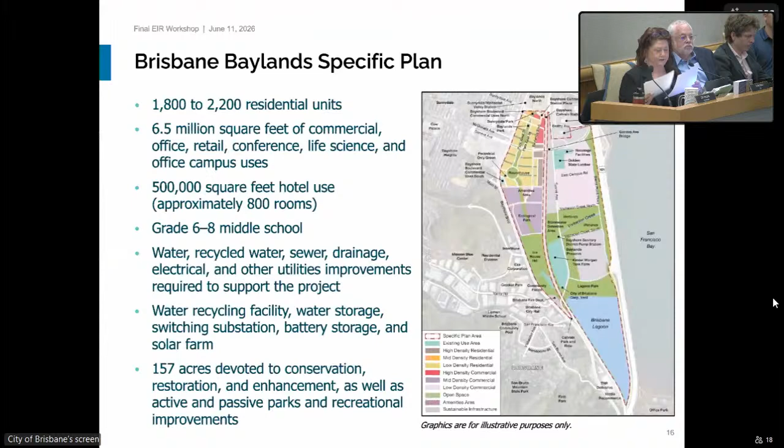An overview of the project. We went through this 2 weeks ago, so I'll make this brief, but the project includes residential, commercial, office, retail, and other kind of associated uses, a hotel, middle school, various infrastructure improvements, and just shy of 160 acres dedicated to conservation, restoration, enhancement, including active and passive parks and recreational improvements.

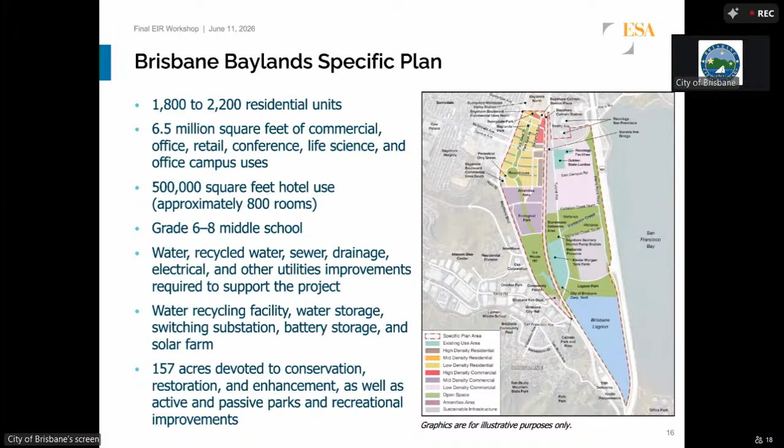The project history, I'm going to try to wean this down just a bit, but it essentially began in 2005 when the applicant first filed a specific plan, or the property owner did, and that initiated kind of the preparation of the specific plan application, and it continued through to 2011 when the applicant then submitted a revised specific plan addressing the entirety of the site.

And that began preparation of a programmatic EIR. City Council certified the program EIR in 2018 and approved General Plan Amendment 1-18, which was then placed on the ballot for ratification as Measure JJ, which was approved by the voters in November of that same year in 2018.

Subsequently, General Plan Amendment 1-19, which was related to fully implement Measure JJ, was approved in 2020. That required revisions to what was then the current specific plan. So between 20 and 23, the applicant prepared a revised specific plan, which commenced then the environmental process for what's in front of you today, this EIR.

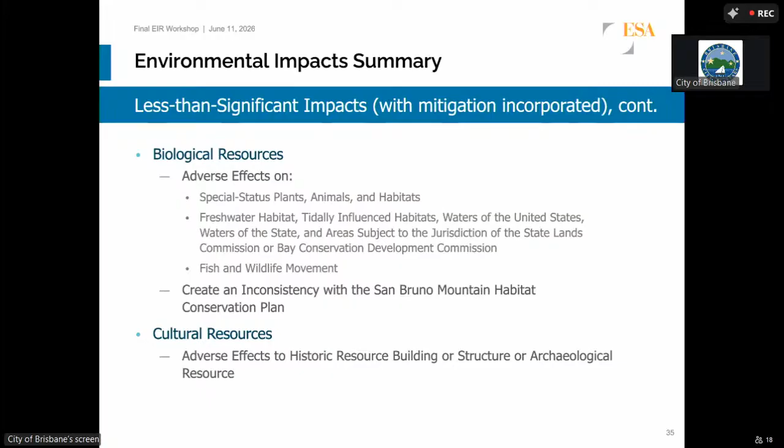Cultural and historic resources, in this case the roundhouse, and archaeological resources would be reduced to a less than significant level with mitigation.

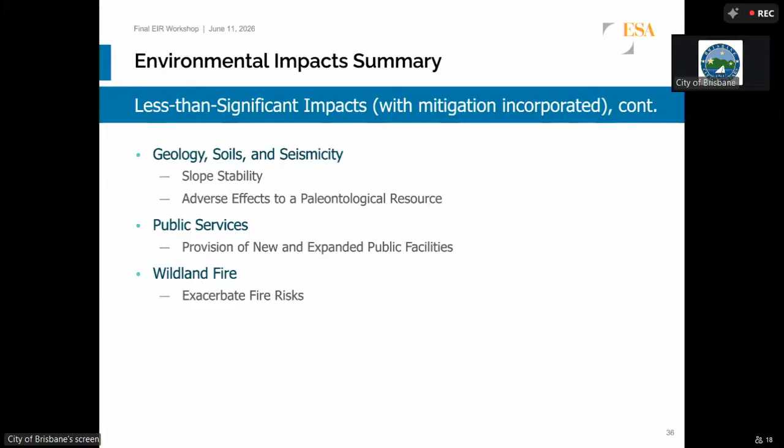Geology, soils, and seismicity, slope stability, fine with mitigation. Paleontological resources falls under geology, but I continue to think of it under cultural. With mitigation, that is also less than significant. The provision of new and expanded public facilities would be properly mitigated, and there would be no exacerbation of fire risks.

I'm going to have the same admonition I did with the less than significant without mitigation. Transportation, air, and GHG will be covered in much more detail with my colleagues, but essentially this project would facilitate other travel modes - transit, bicycle, pedestrian - would not create hazards to vehicles, bicyclists, or pedestrians, and would not impede access for emergency vehicles, would not expose sensitive receptors to substantial pollutant concentrations or odors. I'm going to skip GHG and let Mr. Schuster cover that in detail.

Same with vibration - it would not result in temporary or permanent increase in vibration or expose people to high vibration levels. And hazards and hazardous materials - any routine transport, use, disposal, or management are covered by a vast range of regulations. Similarly, there would not be any hazardous or acutely hazardous materials or waste used or emitted within a quarter mile of a school.

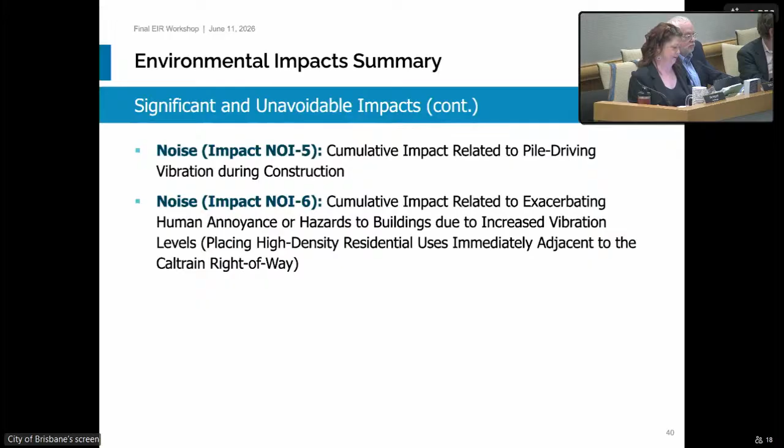Okay, thanks Terry. Evening commissioners. I'm going to talk about air quality, noise, greenhouse gas, and energy.

The EIR concludes that construction and operational emissions would exceed Bay Area regional thresholds without mitigation, and identifies all feasible mitigation to reduce emissions from sources including construction equipment and trucks, fugitive dust, paints and consumer products, emergency generators, operational trucks and passenger vehicles, and other sources. However, given the size and scope of the project, these mitigation measures are not enough to reduce emissions below the bright line criteria pollutant thresholds, and this impact remains significant and unavoidable.

I want to make a distinction between the health risk impact, which is AQ2, which looks at toxic air contaminant exposure. That impact is less than significant. So one is just regional mass emissions of ozone precursors and particulate matter.

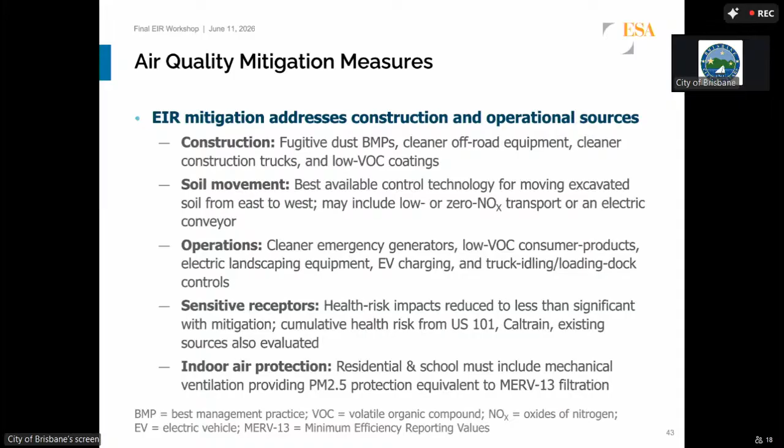Many of these measures also reduce health risks and greenhouse gas. Next slide.

Summary of AQ2, which is exposure of sensitive receptors to toxic air contaminants, primarily DPM and fine particulate matter, or PM2.5. This analysis looked at existing offsite homes near the project site, as well as new on-site receptors — meaning children, residents, schools, daycare, hospitals, that kind of thing. Basically anywhere a child or potentially susceptible person could live.

The analysis also looked at cumulative health risks — would the project exacerbate existing sources of TAC emissions? These include things like US 101, Caltrain and rail sources on the railway, permitted stationary sources, and other sources within a radius of the project site that exist currently. The project is required to install air filtration at residence and school locations.

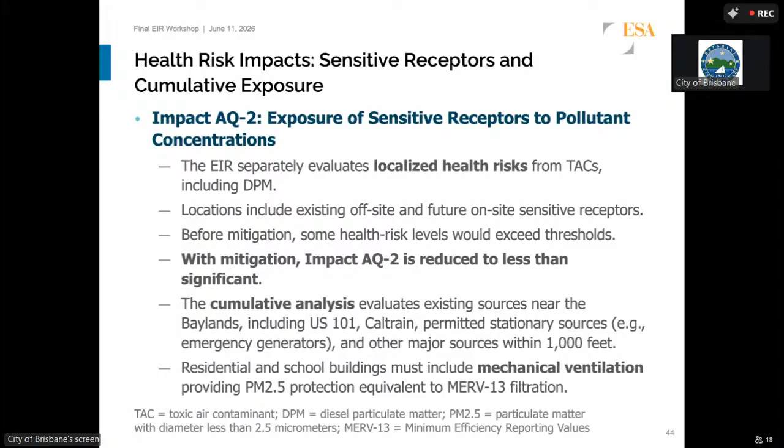Next slide. A couple short FAQs here. What controls construction dust? The project's Stormwater Pollution Prevention Plan, or SWPPP, requires dust controls, including air district best management practices. These include things like watering exposed surfaces, covering haul trucks, street sweeping, speed limits on unpaved roads, equipment wash off, etc.

Diesel generators is another topic that came up in response to comments. The project has extensive solar and battery backup systems, so the question is, why do we need diesel generators? The main reason is it's required by California building code for certain building types during power outages and emergency use to supply critical power. These generators will only be needed during those emergency events, and the on-site battery systems will substantially reduce the need for them, although the EIR did assume a conservative assessment of their operation.

Finally, data centers and warehouses — those are not permitted uses at the Baylands, so the EIR did not evaluate air quality impacts from data centers.

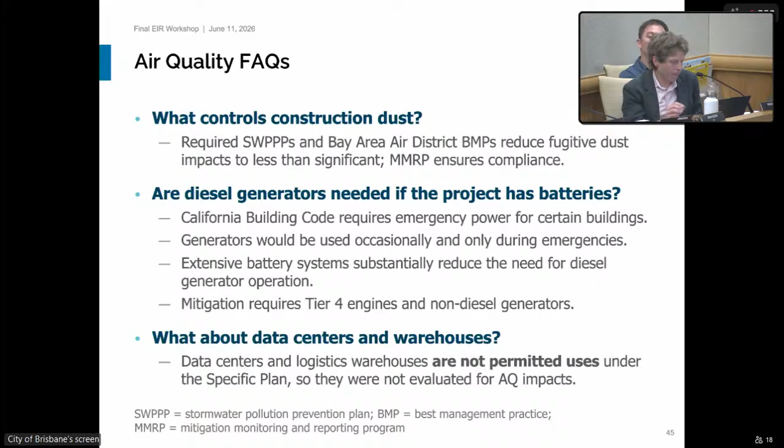Moving on to noise. The first significant and unavoidable impact is Noise 1, which evaluates construction noise. The analysis considers the full build-out, multi-year construction, daytime and possible nighttime work, both on-site and off-site noise receptors, and a wide network of monitoring locations. Sources include pile driving, soil hauling, on-road trucks, and off-road equipment. The various thresholds evaluated include local code standards — time and noise levels expressed as dBA, or decibels above ambient or total decibel levels.

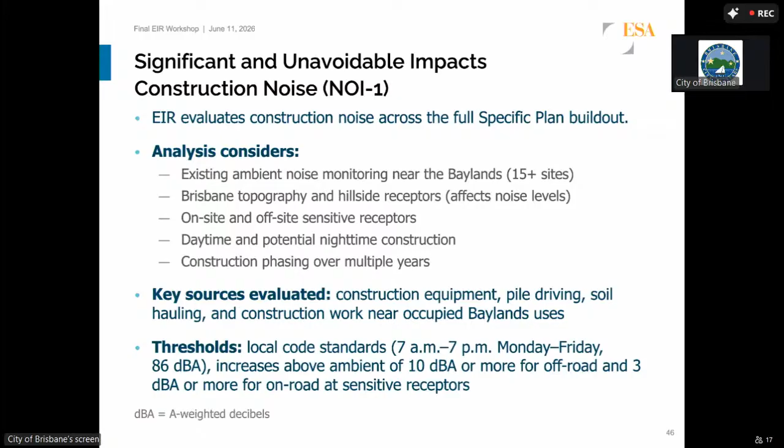Next slide. The analysis found that noise sources would exceed those thresholds in some cases, mostly from overlapping construction activity and pile driving near occupied uses, as well as trucks hauling soil on Bayshore, Tunnel, and Blanken. The thresholds are lower for nighttime, so there are also some nighttime impacts.

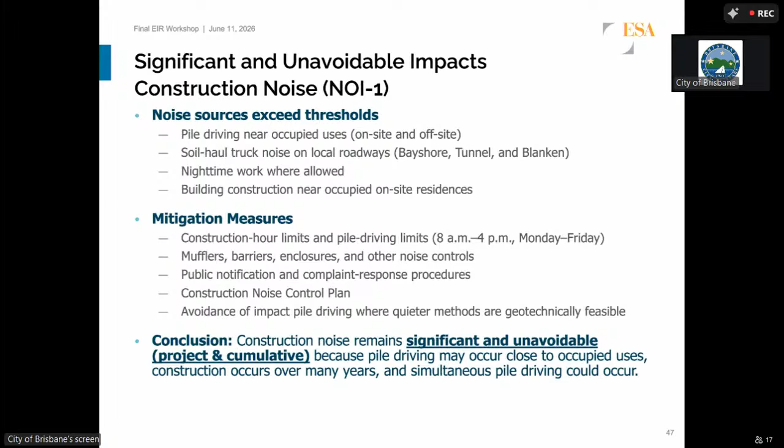There are a lot of mitigation measures to reduce these impacts, including hour limits on construction, further hour limits on pile driving, barriers, mufflers, and enclosures, a public notice and complaint process, and construction noise control plans for development, which require city approval.

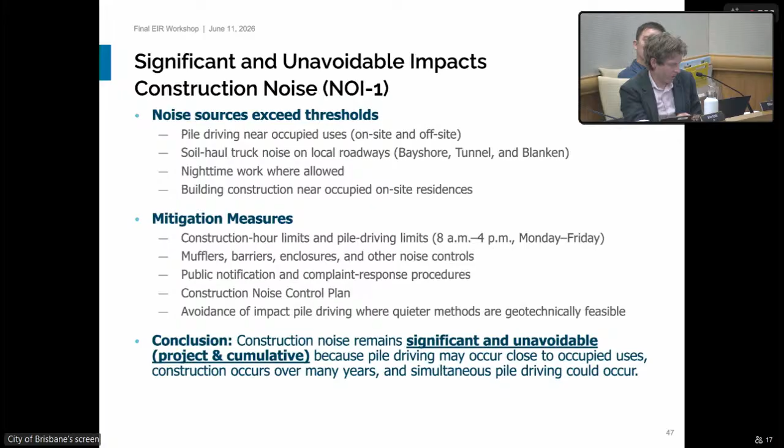However, despite those measures, the impact remains significant and unavoidable because pile driving and other activities may occur simultaneously near receptors. Next slide.

Oh no, okay, my computer just crashed. But I have a backup. Does it have my notes? It has notes — I printed out a copy of this, so I will go to the hard copy. Where were we? Noise 2, right? Okay, there we go.

So impact Noise 2 looks at operational stationary noise sources. These are things like mechanical equipment, HVAC, loading docks, parking, wastewater reclamation facility, amplified sound, and battery storage and substation.

Mitigation for this impact includes similar measures to construction: screening, setbacks, barriers, mufflers and enclosures, loading dock controls where trucks would park and operate, and future acoustical studies on development, which again requires city review before approval. The finding here is that although individual sources can be controlled and must meet standards to reduce their individual noise impact, the aggregate of noise sources will exceed the threshold — in other words, noise from multiple sources happening at the same time.

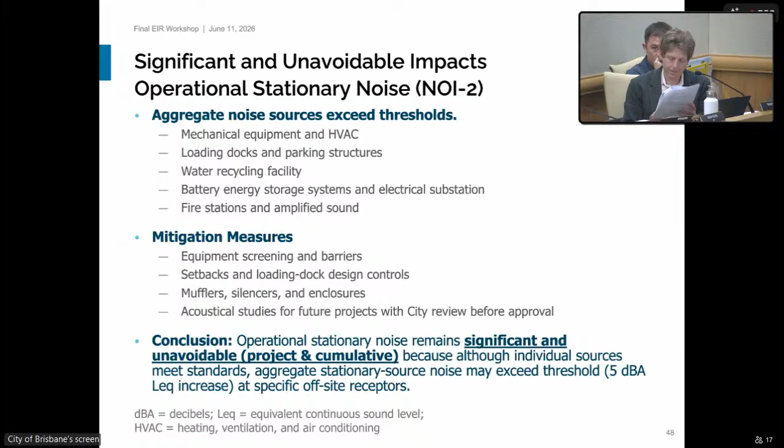Although I will note that, and Matt will touch on this later, the project has a very comprehensive TDM program to reduce trips and VMT.

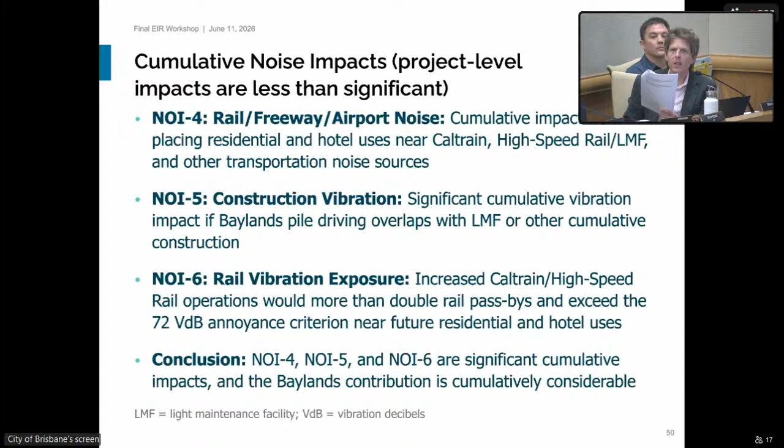The remaining noise impacts are listed here. These are less than significant at the project level, but are cumulatively considerable. Number 4 is rail, freeway, and airport noise, which includes things like Caltrain, high-speed rail construction and operation, and other off-site transportation noise.

Number 5 is construction vibration, which is vibration from construction activities—again, a cumulatively considerable impact due to overlaps with high-speed rail activities mostly. Noise 6 is rail vibration exposure, from operations of rail. So Caltrain, high-speed rail, plus project vibration would have a cumulative effect.

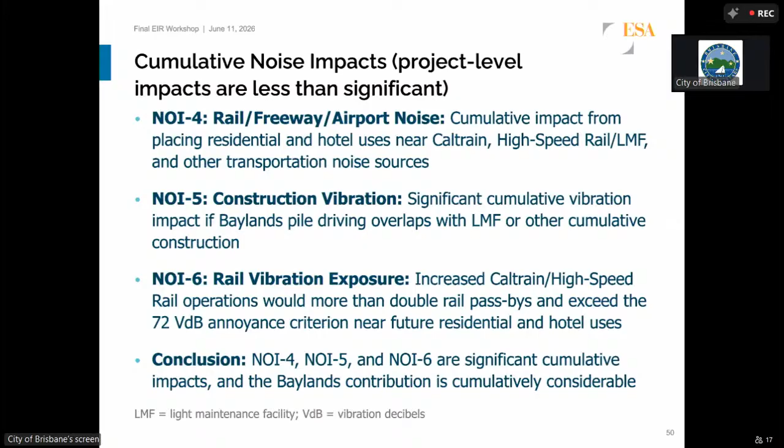Okay, next slide. Moving on to greenhouse gas.

In the draft EIR, this is a major revision in the final EIR, which removed impact GHG1. GHG1 focused on project site emissions and compared to a net zero threshold, or basically a zero threshold of greenhouse gas. This was removed in the final EIR to better align with air districts, the Bay Area Air District's greenhouse gas thresholds, which are a BMP list of project features, and also to better align with the state's climate goals for housing, transit-oriented development, and other related objectives.

So the EIR did evaluate greenhouse gas under impact GHG2, which was a quantitative assessment of emissions, as well as GHG3, which was a consistency analysis with applicable plans and policies. Next slide.

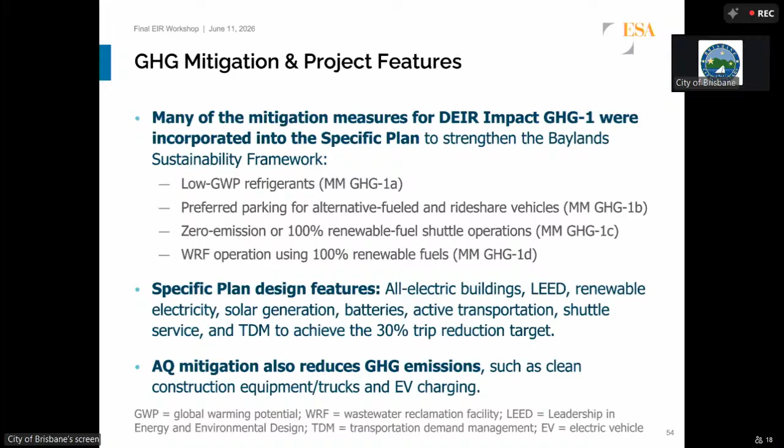All right, and then we're on to energy, and I'm almost done. We had 2 impacts on energy. One is looking at whether the project consumes energy in a wasteful or inefficient manner. Given the sustainability and efficiency features of the project, as well as the extensive solar and battery systems, this impact was found to be less than significant.

Impact 2 looks at conflict with energy plans and policies, including regulations like Title 24 and CalGreen standards, EV charging requirements, city reach code, and the transit-oriented growth framework of Plan Bay Area. This impact was also less than significant because the project complies with all of those.

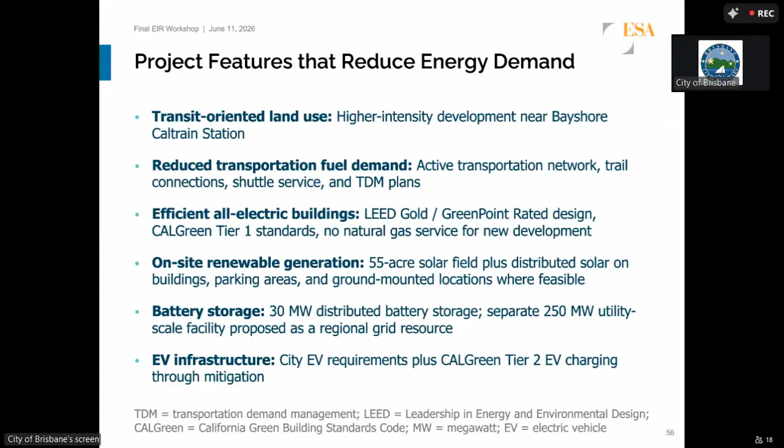And then finally, a slide summarizing various features that reduce energy demand of the project, including transit and vehicle fuel reductions, electric and efficient buildings, on-site renewable generation, and off-site renewable requirements for the remainder of electricity, battery storage, and EV charging. And I think that's the end of that. Okay.

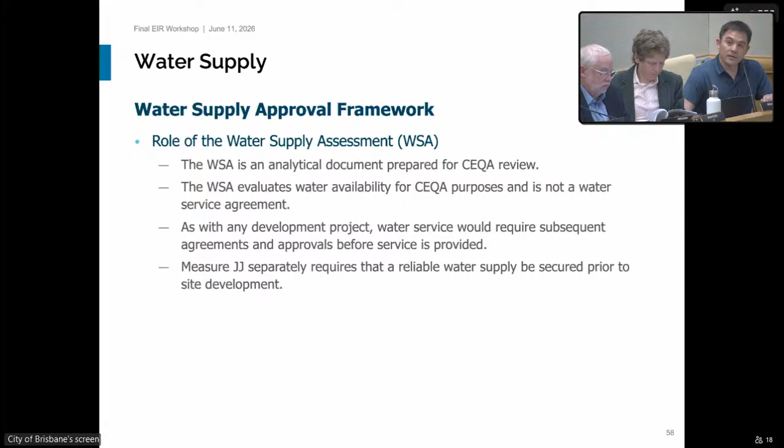Measure JJ addresses a related but separate requirement. It requires that a reliable water supply be secured prior to site development. So the question addressed by the final EIR is whether sufficient water supplies are available. How water service would ultimately be implemented involves subsequent regulatory actions and water service agreements that occur outside the CEQA process. In short, the WSA evaluates water availability, while future approvals and implementation agreements are the mechanisms through which water service would be established, consistent with Measure JJ's requirement.

The final EIR relies on the approved water supply assessment to evaluate water supply impacts. The WSA analyzed whether sufficient water supplies are available to serve the Baylands specific plan and other projected demands over a 20-year planning horizon. It evaluated water availability under normal year conditions, single dry year conditions, and multiple dry year conditions, consistent with California's SB 610 water supply planning requirements.

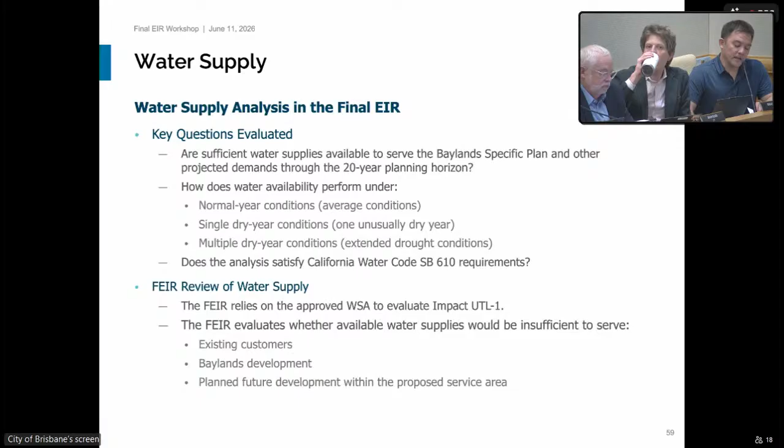Using that analysis, the final EIR evaluated whether available water supplies would be insufficient to serve existing customers, Baylands development, and other planned future development within the proposed service area. In other words, the detailed supply and demand analysis is contained in the water supply assessment, and the final EIR relies on that analysis to reach its CEQA conclusions.

Based on the approved water supply assessment and supporting analysis, the final EIR concluded that sufficient water supplies are available through 2045 under normal year conditions. The analysis also evaluated drought conditions. Under dry year and multiple dry year scenarios, the assessment incorporates implementation of applicable water shortage contingency plans and other regional water supply reliability measures. Based on that analysis, the final EIR concludes that impact utility 1 for water supply would be less than significant.

The final EIR also identifies several future actions that would occur outside of the CEQA process, including service area expansion actions and approvals involving LAFCO, the CPUC, and the SFPUC, and future water service implementation agreements as required. These are implementation and regulatory steps that would occur after CEQA review and are separate from the final EIR's determination regarding water availability.

Turning to recycled water treatment and distribution, an important component of the project's overall water strategy is the proposed Baylands water recycling facility. The facility would create a local, drought-resistant recycled water supply that reduces demand on potable water supplies and benefits both the Baylands and other customers within Cal Water's South San Francisco district. The system would provide recycled water for landscape irrigation and other non-potable uses, including toilet flushing and cooling systems. The facility is designed with approximately 1 million gallons per day of treatment capacity.

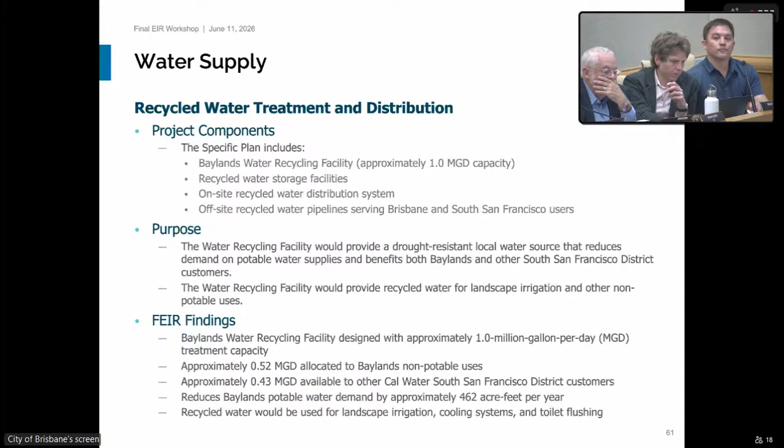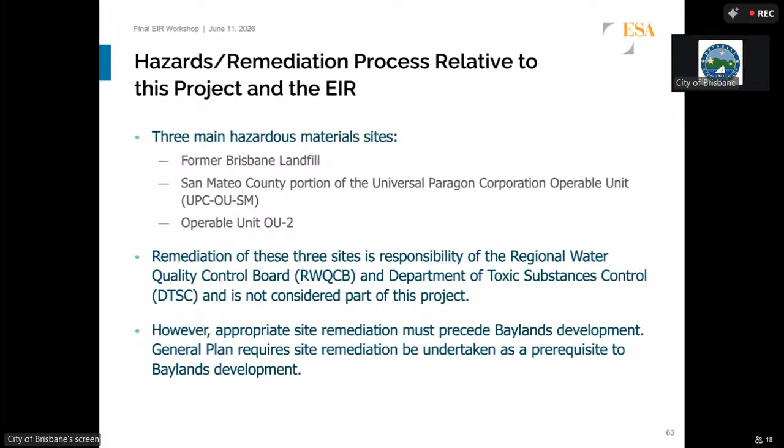For this particular area, there are three main hazardous materials sites. These consist of the former Brisbane landfill, the San Mateo County portion of the Universal Paragon Corporation Operable Unit, called the UPC OUSM, and then Operable Unit OU2. I want to touch on a couple of important points. One, the remediation of these three sites is the responsibility of the Regional Water Quality Control Board and the Department of Toxic Substances Control, and is not considered part of this project.

However, the appropriate site remediation must precede Baylands development. The general plan requires site remediation be undertaken as a prerequisite to the Baylands development. In other words, these remediations will be processed regardless of what you do here.

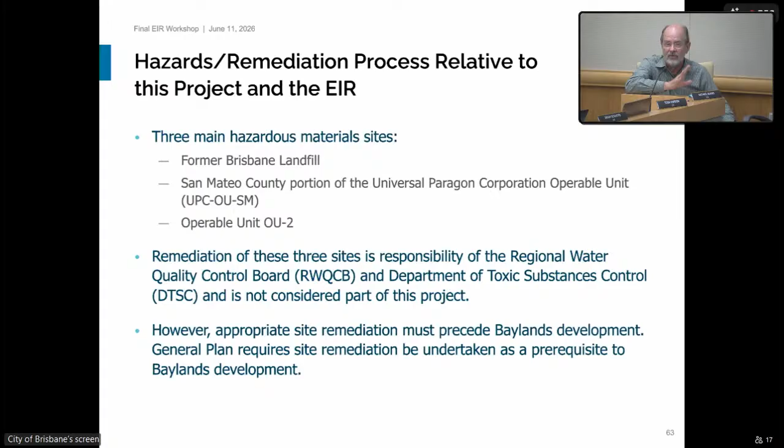The former Brisbane landfill is a closed, unlined landfill where buried waste is covered with fill and inert debris. Some of the surface area is developed, some has hardscape, and some is pervious. Some of the surface also has clean fill stockpiled for future use. This landfill has an active landfill gas collection system, a groundwater monitoring network, and a leachate seep collection system. The leachate contains dissolved metals, ammonia, volatile organic compounds, and semi-volatile organic compounds.

The planned remediation for this consists of removing the stockpiled clean soil, installing a cap, and constructing a leachate collection system. Because the landfill is unlined, the leachate collection system will also extract groundwater. This will serve to capture and pull groundwater from the UPC OU and the OU2 sites located west and adjacent to the landfill.

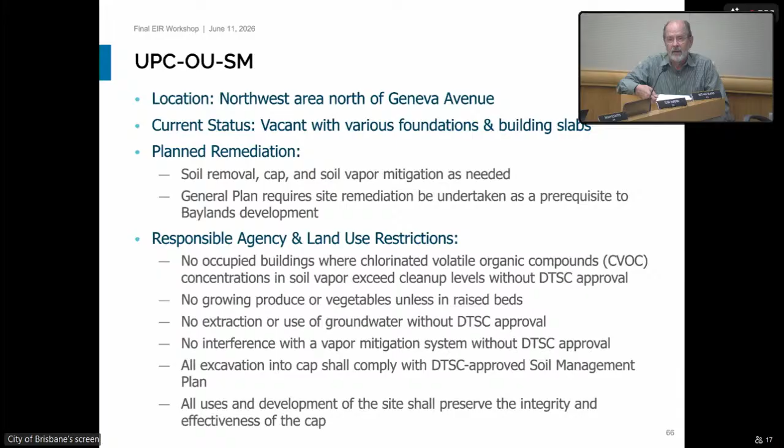Operable Unit 2 consists more of the former rail yards that are west of the landfill and south of the other operable unit. At one time, in addition to the rail yard operations, they had turntables and a roundhouse, machine and erecting shops, a 3 million gallon oil tank, a tank and boiler shop, and the switching yard and a solid waste dump site. Currently, the site is vacant with various foundations and building slabs, and has the Caltrain tracks along the east side.

The current use in the industrial way area to the south is automobile garages, storage warehouse, and a boxing ring. The remediation to date has consisted of removal of underground storage tanks and contaminated soil. For this area, the chemicals of concern are arsenic, lead, diesel, and chlorinated solvents in the soil, and then chlorinated solvents in the soil vapor and groundwater.

Similar to the other operable unit, the planned remediation will consist of installing and maintaining a cap, removing contaminated soil where cap emplacement is impractical, installing soil vapor mitigation systems where soil vapor testing indicates soil vapor above regulatory action levels inside buildings, and finally operating an in-situ groundwater remediation system to reduce volatiles to below regulatory action levels. For this operable unit, the Water Board is the responsible agency that will enforce remediation and land use restrictions, again including that you cannot disturb the cap without their approval.

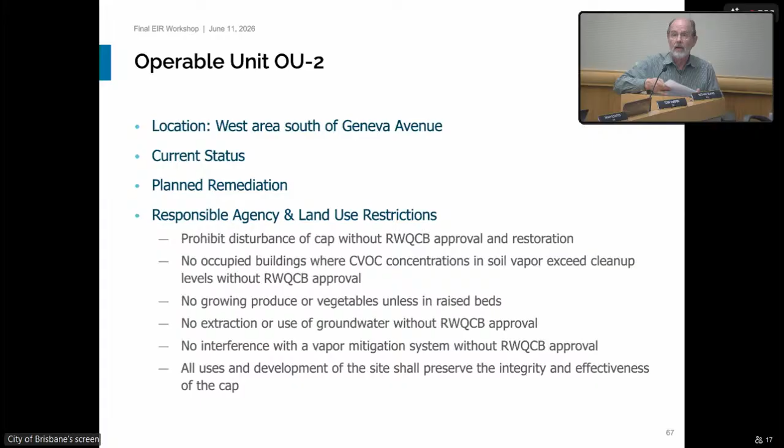In closing, the site remediation for all three of these sites is a prerequisite to Baylands development. Land use restrictions will be established and enforced to protect and maintain the remedial actions. And on that, I'll turn it over to the next speaker.

I think that's me. So, more on alternatives and other components of the EIR we've not yet touched on.

I talked about the need for alternatives. CEQA requires an evaluation of alternatives to the project that would attain most of the basic project objectives and reduce or eliminate impacts, one of them being a no project alternative.

In this case, we looked at both no project, no build, meaning nothing occurs, and no project general plan build out. We then clustered the alternatives into the proposed project's density, where we included the same density but did things slightly differently. One of those, occurring under both the proposed density and a reduced density, is development around a 45-acre light maintenance facility.

But under the proposed density, it was just how do you balance commercial uses. Some reduce building heights to the west in the towers but increase office heights, and then reduce density, meaning less development overall. So less commercial, less development, but still the 45-acre LMF. Again, balanced commercial, but less, with reduced building heights.

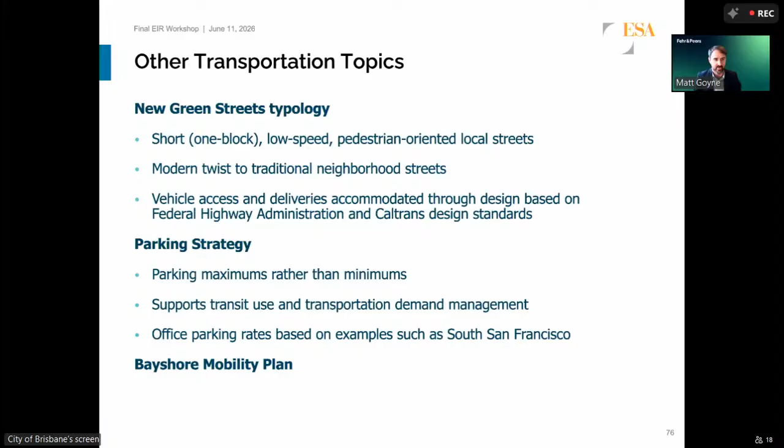This discussion about the future of Bayshore did not start with Baylands. Bayshore Boulevard was the original Highway 101 and has functioned as a regional through route, with 60 to 80% of traffic traveling through Brisbane.

The city has long expressed a desire to reduce regional traffic using Bayshore through the city. Brisbane's general plan is very explicit, through program C.1.b, that developing a strategy that reduces regional traffic through the community while improving local mobility for Brisbane residents and businesses is important. The Bayshore Mobility Plan is the outcome of that and several prior planning efforts that I'll describe later.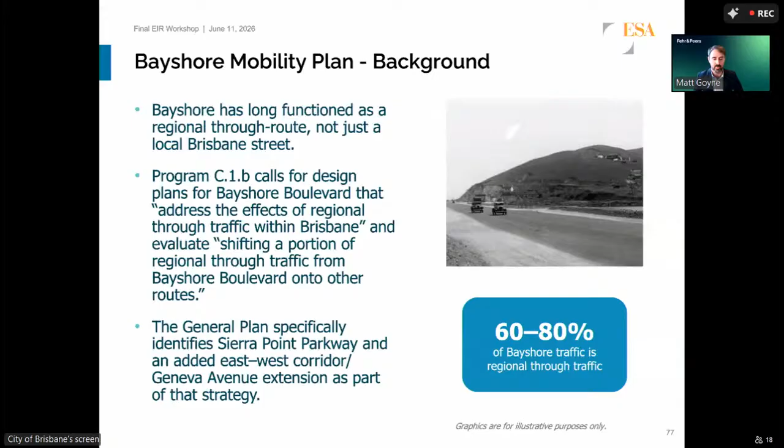This is really a unique moment for Brisbane because Bayshore has served in this role for many years. With the Baylands specific plan, there are now several additional roadways that could provide additional access through the community, potentially redundant with Bayshore.

This is especially important for areas with more activity, where there's a lot of crossing activity and different movements, including central Brisbane and the changes that will happen on the northern segment of Bayshore next to the future Baylands.

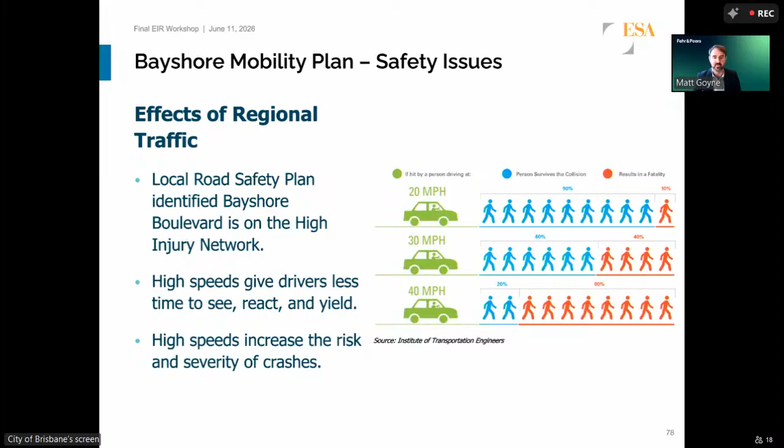But when we add regional traffic, the picture changes. Regional traffic makes up the majority of traffic today on the corridor and is projected to continue to grow as things like Candlestick Point, Hunters Point, and other development projects build out in the area. So under future conditions, regional traffic uses all available roadway capacity on Bayshore under any scenario evaluated through the different studies over the past years.

So the issue here, once again, is that what Brisbane does locally with respect to land use is less important than how Bayshore functions within the regional network. This is consistent with the findings from the previous Baylands EIR as well as what's captured in the general plan.

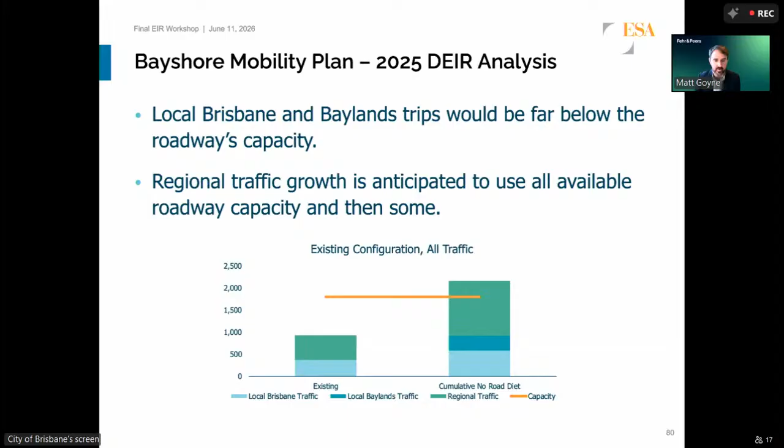This slide summarizes how existing versus future traffic patterns compare, consistent with prior analysis as well as the current analysis. We see large increases in regional traffic, travel times will increase because of that, and existing safety issues remain. So the question that has faced Brisbane for decades is: what role should Bayshore play in the future?

This is where the Bayshore Mobility Plan comes in to address the general plan goals. City staff and the project team developed 5 goals for the Bayshore Mobility Plan based on issues outlined in the city's general plan, as well as other recent studies, including the prior EIR and the city's local road safety plan completed a few years ago.

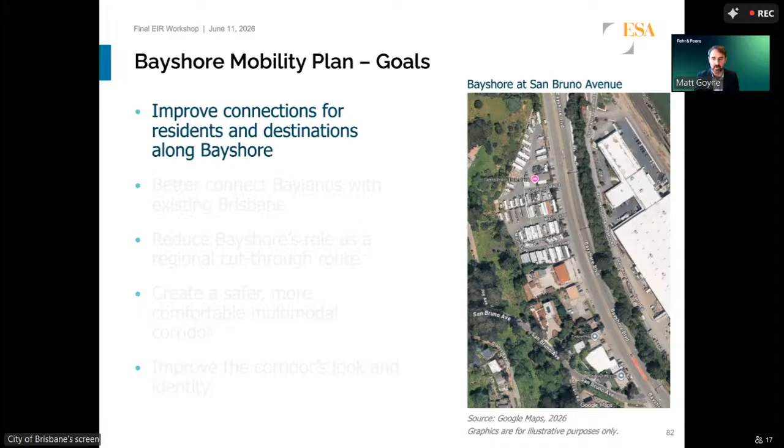First goal is that the plan should improve safe access for people and land uses already along Bayshore, such as the Sierra Point Trailer Park. Currently, this community is disconnected from the rest of the city's walking and bicycling network, and drivers need to pull directly out onto a fast arterial when exiting the community.

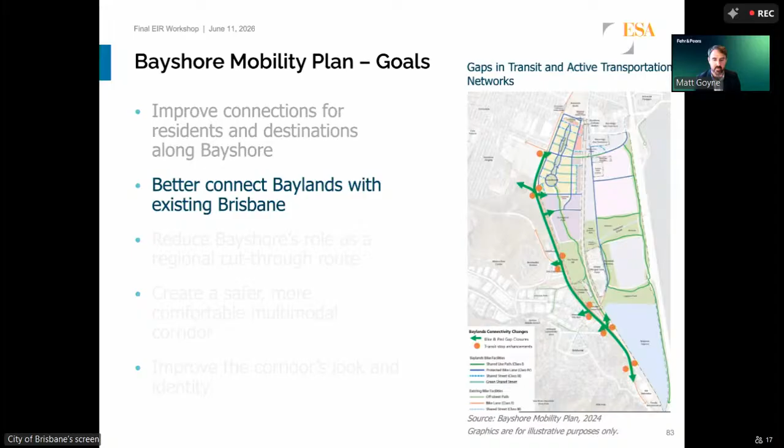Second, the plan should improve multimodal connectivity for people traveling between Baylands and the existing city of Brisbane. This figure from the Bayshore Mobility Plan illustrates gaps in the transit, bicycle, and pedestrian networks that the plan could close.

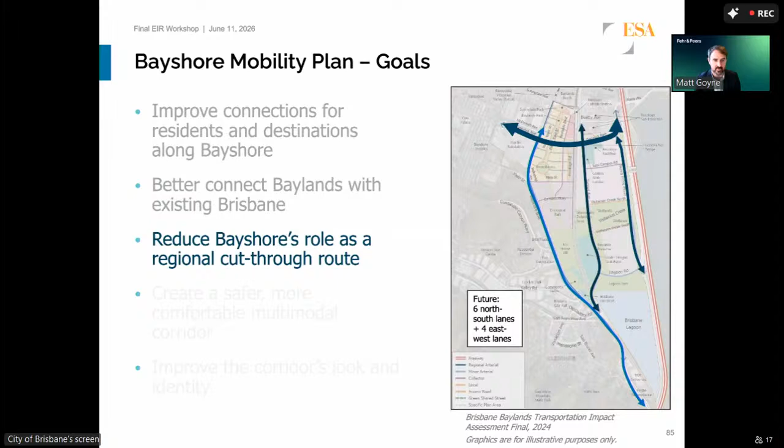This map illustrates the future envisioned within the general plan, where Geneva Avenue more directly connects to 101, providing a more direct route to US 101 for regional trips from Daly City and San Francisco. Further, the Sierra Point Parkway extension would provide an additional route for traffic parallel to US 101. Overall, fulfilling the general plan's vision would provide drivers more direct routes for regional traffic while maintaining at least the same number of north-south vehicle lanes through Brisbane.

And finally, the last 2 goals were to provide a safer, more comfortable corridor for all travelers and to improve the corridor's look and identity as a Brisbane street.

Additional studies have been completed since the previous EIR that can meet some of these goals. For example, in 2022, the city conducted a complete street safety assessment that evaluated a road diet concept for the southern portion of Bayshore, south of Old County. This would take it from 4 lanes to 2 lanes on that section, with the goal of improving safety, lowering vehicle speeds entering Brisbane from the south, and creating space for a multi-use pathway along the west side of the corridor connecting the Sierra Point Trailer Park to the rest of the city. This is intended to connect that area better and also organize the parking area better by providing more space for people to enter and exit the road.

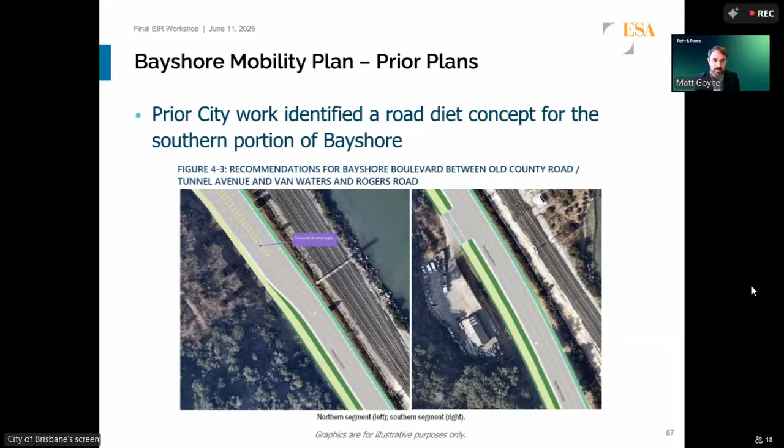Another study finished recently was the city's local road safety plan, which identified changes to signals, lane widths, striping or hardening edges, and dynamic feedback signs. Some of these measures have now been implemented over the last year or two. While these measures have low to medium effectiveness on improving safety and provide spot improvements, they have little effect on reducing overall speeds or attractiveness to through traffic.

Other common roadway safety options for arterial roadways that provide greater safety benefits and could also reduce regional traffic include separating users through sidewalks or multi-use paths, replacing signals with roundabouts, reducing the number of lanes, or intersection features that narrow the crossing distance. Ultimately, because the local road safety plan did not achieve all the plan's goals, additional features were reviewed for the corridor.

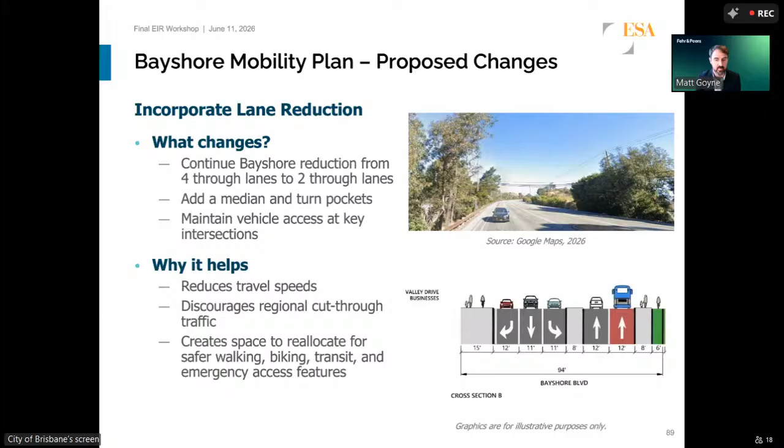So if the lane reduction on Bayshore from 4 to 2 lanes is continued from the section studied previously in 2022, north of Old County Road, this would provide a consistent cross section for the entire corridor. This would be more effective, potentially reducing speeds to 35 miles an hour or below, making Bayshore less attractive as a regional cut-through route while still maintaining local access. The reclaimed roadway space could then allow for features such as a Class 1 multi-use path, safer crossings, median treatments, transit improvements, and emergency access features.

As mentioned, this reclaimed space could allow for a continuous multi-use path along Bayshore that could provide connectivity along the entire length of Bayshore Boulevard, creating a lower stress route for people walking and biking throughout the city, and also allowing better access to transit and safe routes to school near the Baylands.

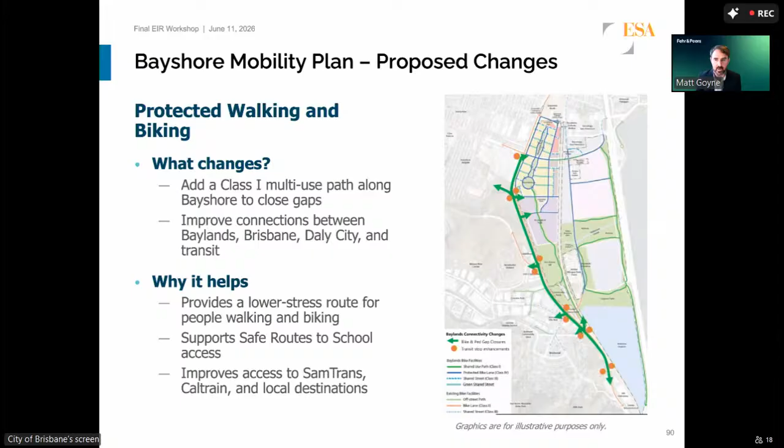So there are specific intersection improvements identified in the plan. This location at Main Street, on the left side of the figure, is the existing leg of Main Street, and Main Street would continue through into Baylands.

This is part of the mitigation measure for the Baylands specific plan, intended to serve as a safe routes to school, connecting Bayshore Heights and Daly City to the Baylands with a school on either side. The design shown here, with one lane in each direction, reduces the distance children and other pedestrians need to cross by half.

It also helps lower vehicle speeds as drivers enter a more active part of the city, and provides protected areas where people can safely wait before crossing. These physical improvements would be paired with operational measures such as crossing guards during school hours.

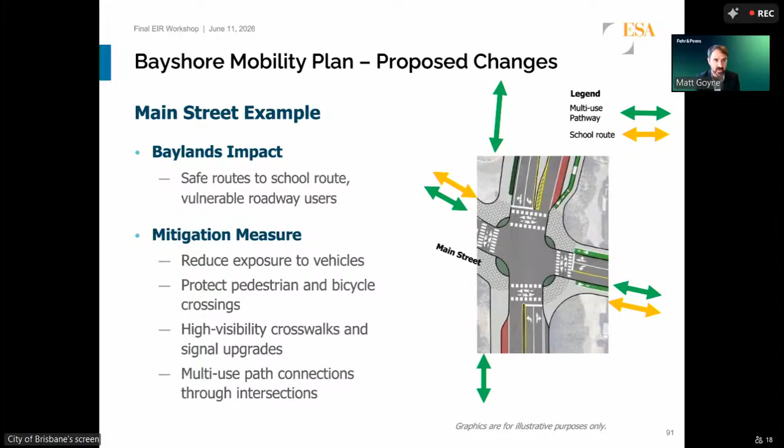Stepping back, this illustrates a broader point: as activity increases along the corridor, whether people walking, biking, or turning in and out of the Baylands in vehicles, the current high-speed conditions on Bayshore become increasingly incompatible with how those intersections will need to function to provide slow, safe access into the site.

Returning to these figures, showing the example of local versus regional contributions with the road diet, the local traffic under existing and future conditions with the Baylands would not exceed the road's capacity.

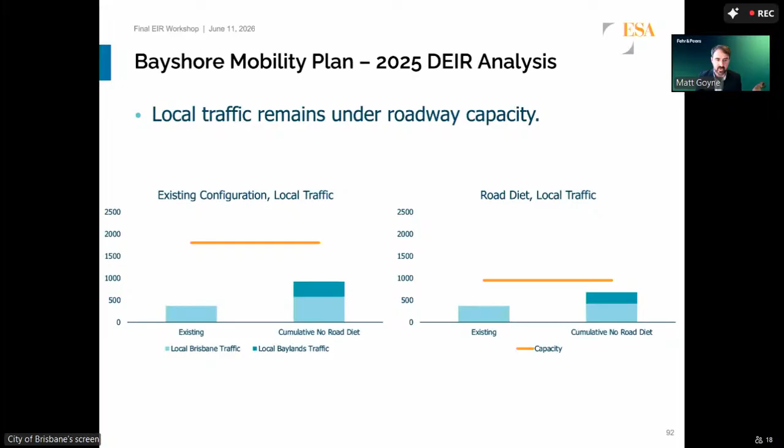But once you add on the regional traffic, under any scenario, regional traffic exceeds available capacity. However, with the road diet, it does achieve some of those goals of reducing the amount of regional vehicles traveling through the city, by nearly 40%, based on those projections.

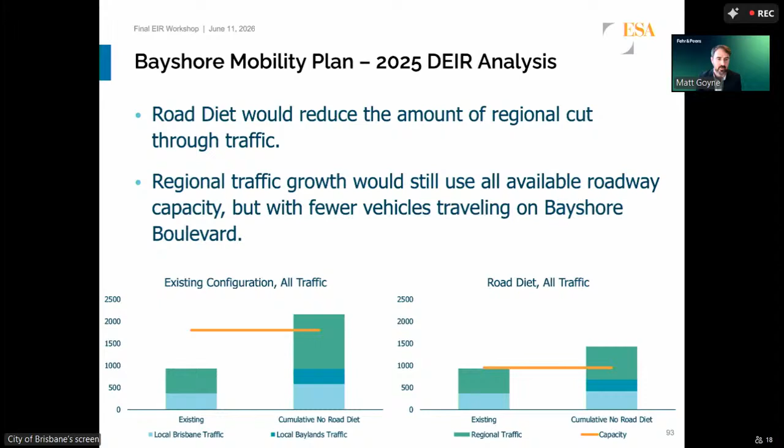In conclusion, returning to this chart, looking at future conditions, as the city evaluates what options it could take with Bayshore, it's going to be faced with a very challenging set of issues where regional traffic and travel times are expected to increase as development happens outside of Brisbane.

The Bayshore Mobility Plan presents an option for reducing some of this regional traffic while providing safety improvements and multimodal travel options. Whether the city adopts this plan or evaluates other plans for Bayshore, they would all need to address the specific issues associated with the Baylands development, such as the incompatibility of wide crossings and fast vehicle speeds through the Baylands area. With that, open it up to questions.

Yeah, thanks. We're at our next segment.

Regarding Bayshore and reducing it from 2 lanes each way to 1, my concern is that traffic is a growing problem in the Bay Area, and I feel like the city of Brisbane removing regional through traffic by switching to 1 lane each way will add to the traffic problem. I think we need to be working together in the Bay Area.